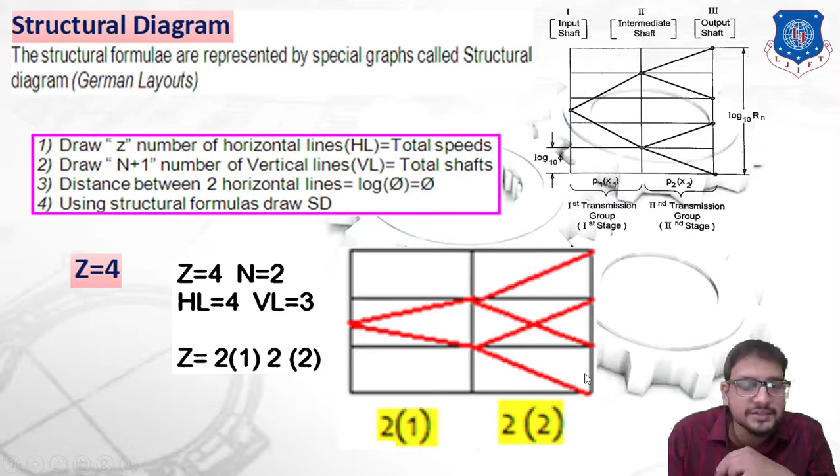Similarly, from this point of the intermediate shaft, again two speed steps can be obtained, so we need to draw two lines. From here one moves in this direction, to this point, and the second in a downward direction. You can clearly see the distance between these two lines is 2 units. So this represents x, which is over here 2. Okay guys, I hope you are clear how we need to draw a structural diagram. Now let us proceed further.

Now how many horizontal lines do we need to draw? We know HL is equal to the number of speed steps, so that is 6. And how many vertical lines? We know it is equal to n plus 1. So n is how much? We would say it is a 2 stage, 3 raised to 1.

So features of structural diagram. So let us discuss that. We can say that information given by the structural diagram is the number of shafts in a gearbox. From this diagram you can clearly see that we can determine the number of shafts, that is, the first represents the input shaft, second represents the intermediate shaft, and the third line represents the output shaft.

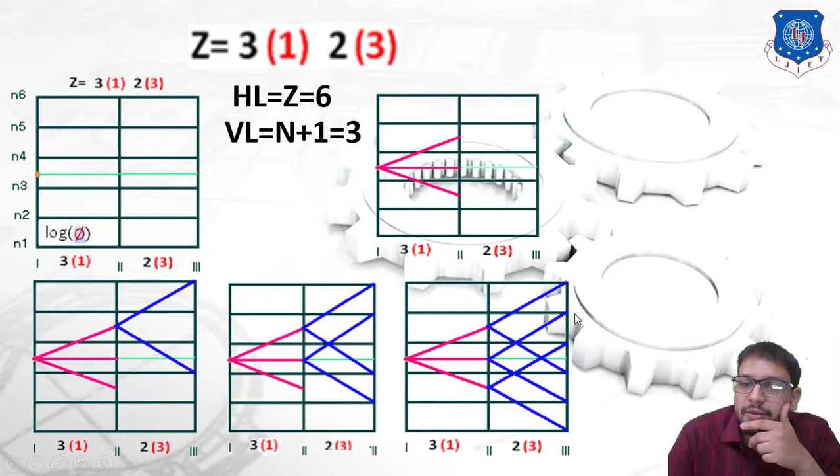Similarly, we can say that the number of gears which are present in a gearbox can be easily determined. Now how we can do that? So one line of this represents one gear pair, the second line represents a second gear pair, and the third line represents a third gear pair. So we can clearly say that over here there are 3 gear pairs available. Similarly, from this diagram over here 2 gear pairs will be available in matching with each of this structural diagram. So from this we can say that the number of gears on each shaft can be determined.

Even there is a formula to determine the total number of gears which are present inside a gearbox. The formula is G = 2(P1 + P2 + P3 + ... + Pn). So if there are 2 stages, it would be 2(P1 + P2). Okay, next information given is the transmission range of each transmission group can be easily determined.

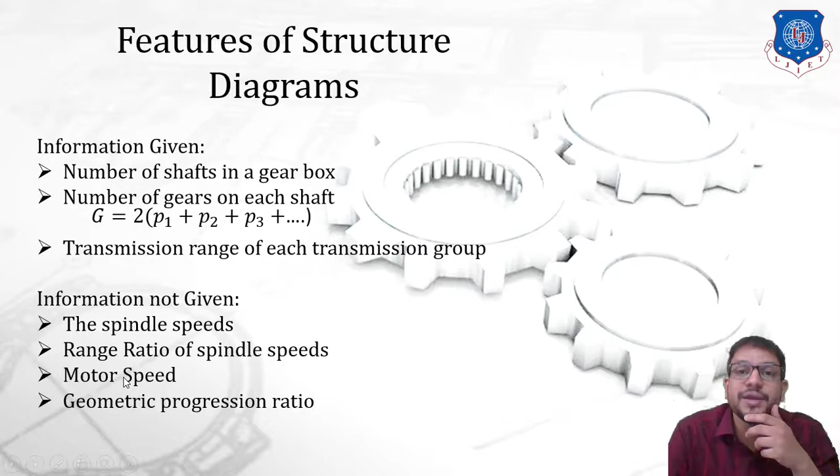Now information which is not given is how much the spindle speed is, the range ratio of the spindle speed, the motor speed, and the geometric progression ratio. So we can clearly say that this information is not given. Now for determining this information, that is motor speed, range ratio, spindle speeds, we need to draw another diagram. That diagram is called a speed diagram or ray diagram. Okay, so let's proceed further to draw that diagram.

Now the next step in the design procedure is we need to select the optimum structural diagram. The first criterion for selecting the optimum diagram is the transmission range restriction, which means there is a formula: Ig stage = phi^((p - 1)x), where phi represents the geometric progression ratio, p represents the speed steps in a stage, and x represents the distance by which two adjacent speed steps are separated. This formula determines the transmission restriction, and this value should always be less than 8 in order to obtain an optimal structure diagram.

Now next, there is the node method of optimization. It basically represents that we require a minimum size of diameter to transmit a maximum amount of power. The node is a point from which a ray starts or at which the ray terminates. So select that structural diagram which has a higher number of nodes.

Okay, next important point for selecting is that a minimum number of gears should be provided on the output shaft. So this is the most important criterion. Remember, whenever we design a structural diagram, we need to keep in mind that there should be a minimum number of gears on the output shaft.

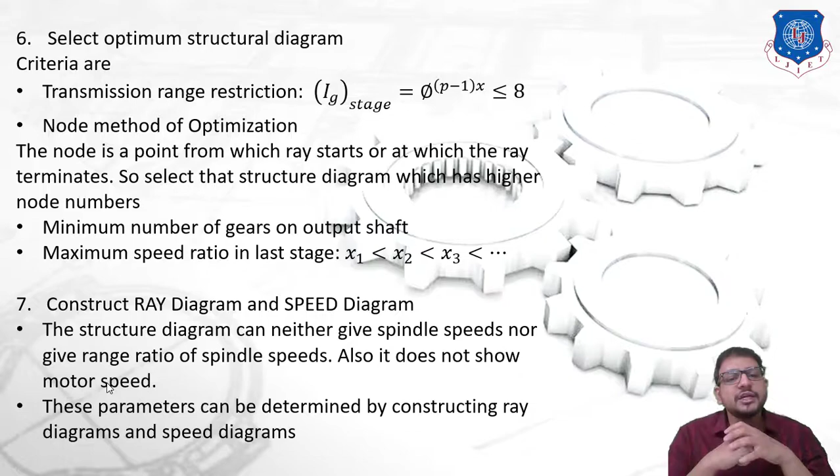Next, we need to construct a ray diagram and a speed diagram. Why do we need to construct these? A structural diagram can neither give us spindle speeds nor provide the range ratio of spindle speeds. Also, it does not show the motor speed. These are the disadvantages of a structural diagram; this information is not given. So for determining these parameters, we need to construct a ray diagram and a speed diagram.

So how do we draw a ray diagram? While drawing a ray diagram, keep in mind that vertical lines should be equal to n plus 2, where n is the number of stages. Horizontal lines should be equal to z if the last speed of the gearbox, that is the maximum speed, is greater than the motor speed NEM. And if motor speed is greater than the maximum speed of the gearbox, HL is equal to Z plus 1.

These are the points to keep in mind while drawing a ray diagram. Remember, vertical lines should be equal to N plus 2, horizontal lines should be equal to Z if the maximum speed of the gearbox is greater than NEM, the motor speed, and Z plus 1 if motor speed is greater than the maximum speed of the gearbox.

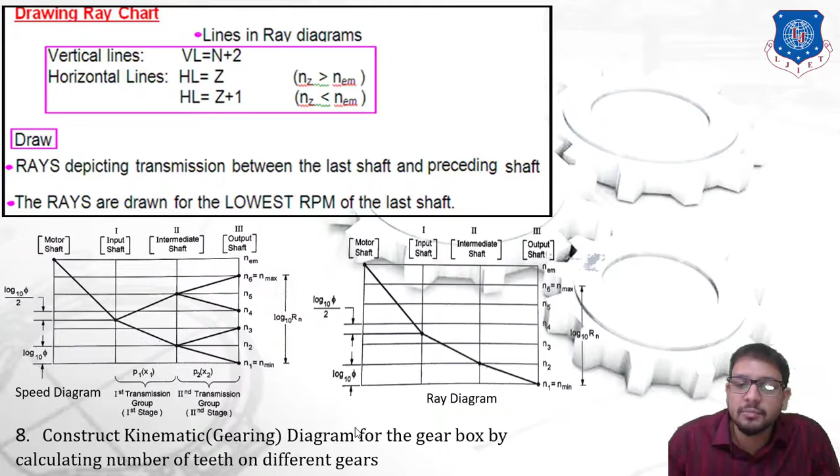So this is going to represent the ray diagram, which I have shown over here. So you can see this is a ray diagram, and this is how we need to draw it. Now the next step is to construct a kinematic gearing diagram for a gearbox by calculating the number of teeth on different gears. Okay, now let us see the comparison between the structural diagram and a speed diagram.

Whereas a speed diagram contains one vertical line for the electric motor, you can see this line, and n plus 1 vertical lines for the input, intermediate and output shafts, which means in total n plus 2 lines are present in a speed diagram. Then comes the next parameter, horizontal lines. A structural diagram contains a number of horizontal lines equal to the number of spindle speed steps, that is, z is equal to the horizontal lines. Whereas a speed diagram contains the number of horizontal lines required for locating all the spindle speeds as well as the electric motor speed.

Next point is based on spindle speeds, that is n. The structural diagram does not give information about spindle speeds, whereas a speed diagram gives all the spindle speeds available. Next point is based on range ratio, denoted by Rn. A structural diagram does not give the range ratio of spindle speeds, whereas a speed diagram does. You can see the range ratio would be log Rn to the base 10, from n minimum to n maximum, as shown in this diagram.